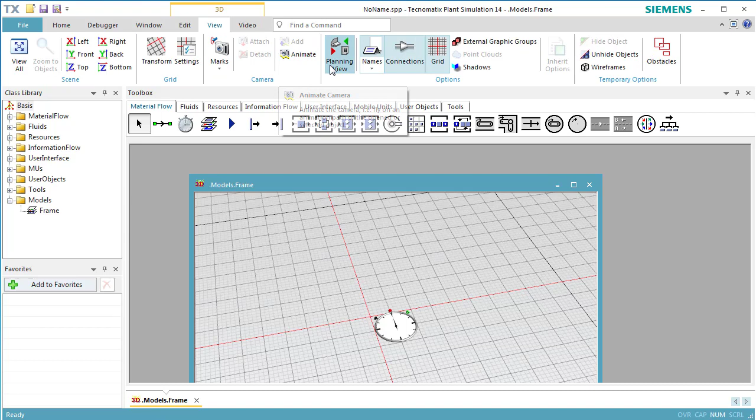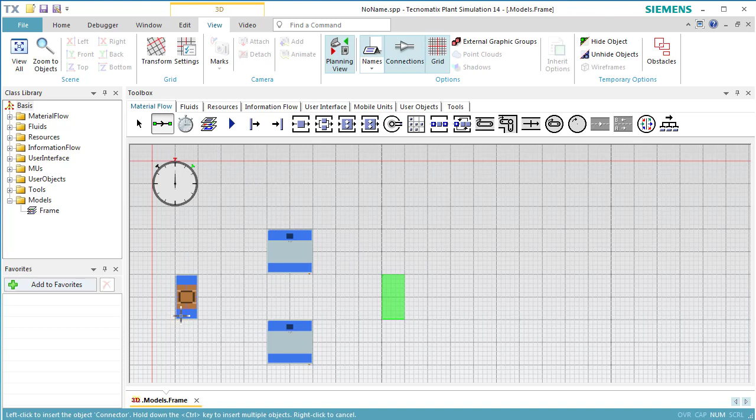To do so, we create a model with a source, two stations representing the main machine and the auxiliary machine, and a drain. The main machine should be the first successor of the source. First, we connect the source and the main machine, and then the source and the auxiliary machine. You can insert the two connections from the two machines to the drain in any order you like.

Then, we open the source to configure it. We want it to produce one part every minute. We click the tab Exit of the source and select the Exit strategy Start at Successor 1.

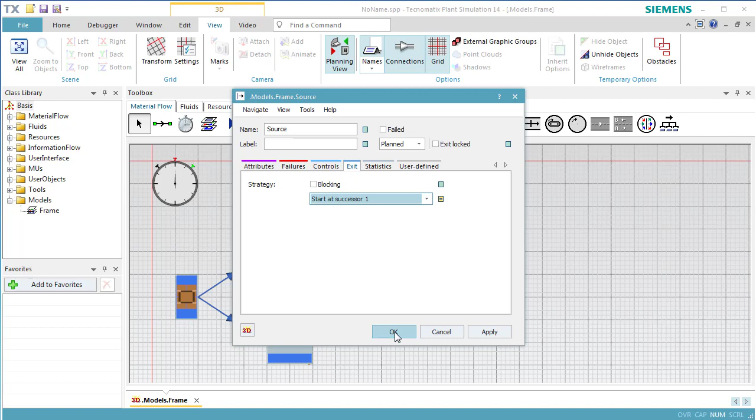We want to simulate interruptions of the main machine caused by failures. To do so, we add a new failure profile by clicking New on the tab Failures. We accept the default availability of 95% and the MTTR of 1 minute. MTTR stands for Mean Time to Repair.

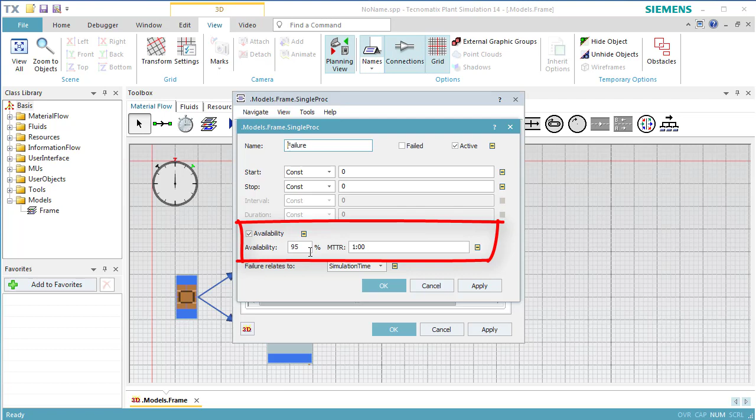As we want to run experiments with the Experiment Manager, we need the simulation to end after a certain time. To enter it, open the dialog of the event controller. Check the tab Settings and type a termination time of 1 hour, 1::, in the text box End of the event controller.

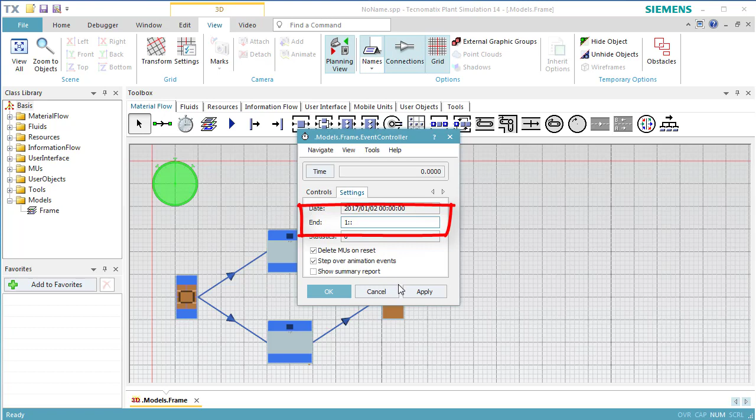Plant Simulation will automatically expand the time to 1 hour. Click OK to close the dialog. This model is suitable for the intended experiment study.

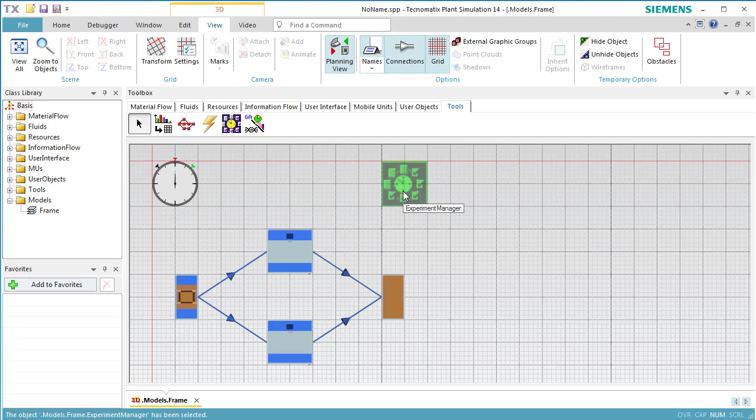Finally, we add the Experiment Manager to our simulation model. You will find the Experiment Manager on the tab Tools in the toolbox. Open it and configure the experiment. We first specify the output values as the target of the simulation study. To do so, we click Define Output Values on the tab Definition.

Drag the auxiliary machine to the first row of the table and drop it there. Then, we extend the name with the statistic value we are interested in, stat working portion, in our case. It's helpful to enter a description of the value, for instance, utilization of auxiliary machine.

We then click Apply to run a plausibility check. It tests whether the entered value exists and is suitable for a statistical evaluation. To enter a further output value, we click into the table Output and press Enter.

We click the main machine and drag it to the second row of the open table. We then place the cursor behind Main Machine, type in a period, and the name of the statistics value that interests us, stat fail portion in our case. It's helpful to enter a description of the value. We entered the description, portion of fail time of the main machine.

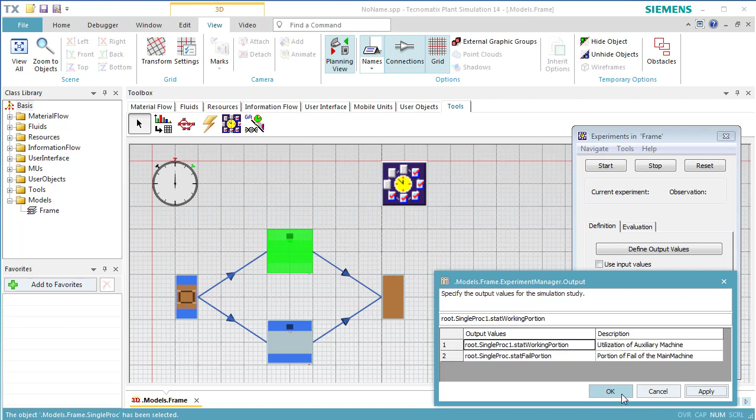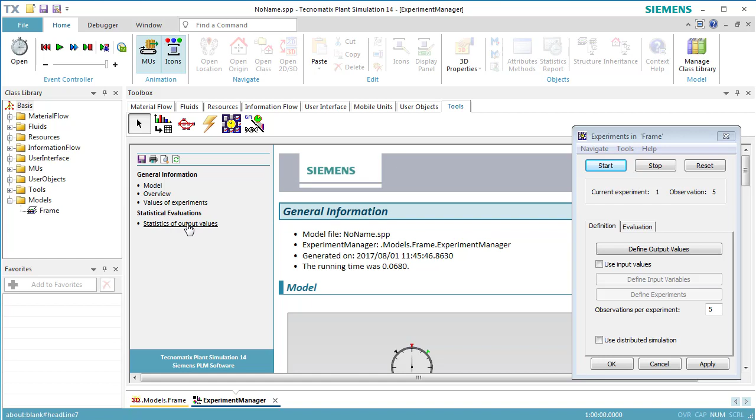We then click Apply to run a plausibility check and click OK to close the table. Next, we reset and start the experiment run. The Experiment Manager executes 5 simulation runs with different random behaviors caused by the failure we entered. After the experiments are finished, an HTML report will open.

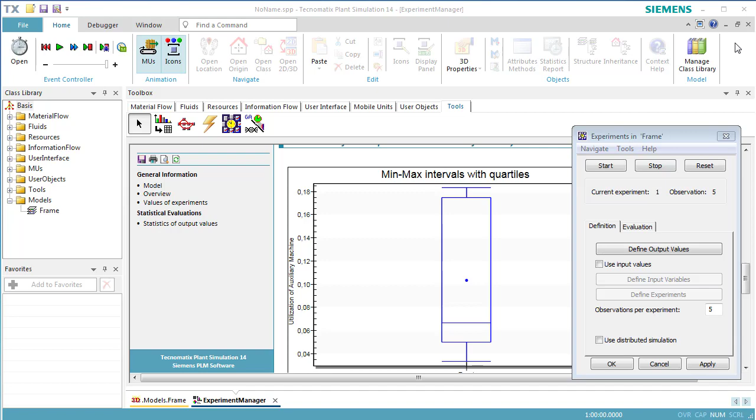A more detailed evaluation is available on the tab Evaluation of the Experiment Manager. Click the button Detailed Results to open a table of the numerical results. Typical statistic values of the observed output values, like the mean value and the standard deviation, are shown in numeric form.

The exactness of the mean value is described by the confidence interval. Be aware that one cannot draw conclusions with absolute safety. One can only make statements about a stochastic model with a given confidence level. The confidence level tells us with which probability the true mean value of a measure is located within the confidence interval. The default value of the confidence level of the ExperimentManager is 95%.

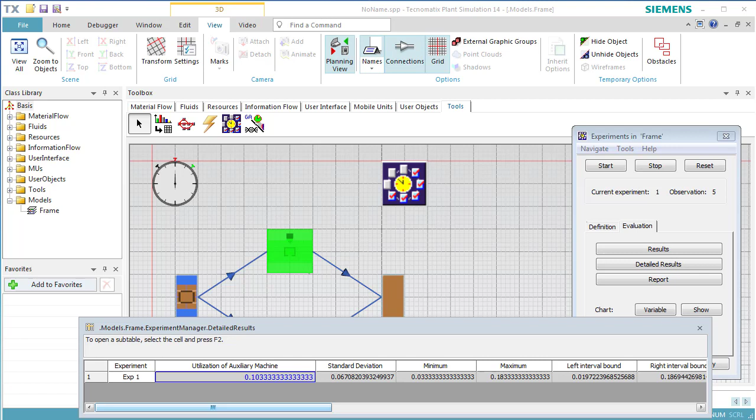After using the ExperimentManager for a statistical analysis, we want to check out how the availability of the machine influences the utilization of the auxiliary machine. We'll change the availability of the main machine. To do so, we define the input value. We select the checkbox Use Input Values and click

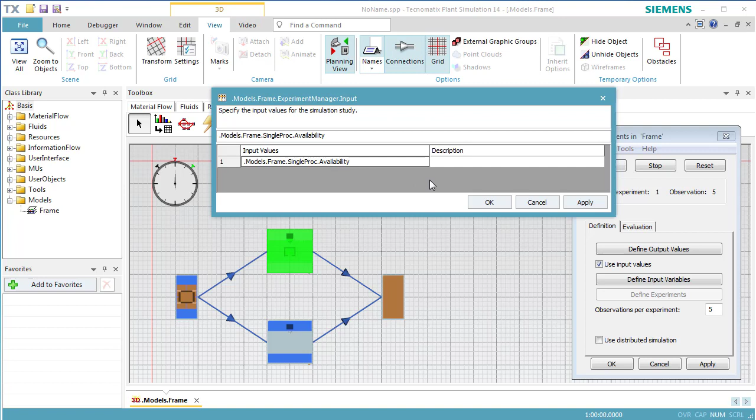Define Input Variables. To enter an input value, we drag the main machine to the first line of the table Input and enter a period, followed by Availability. This activates the button Define Experiments. We click the button Define Experiments.

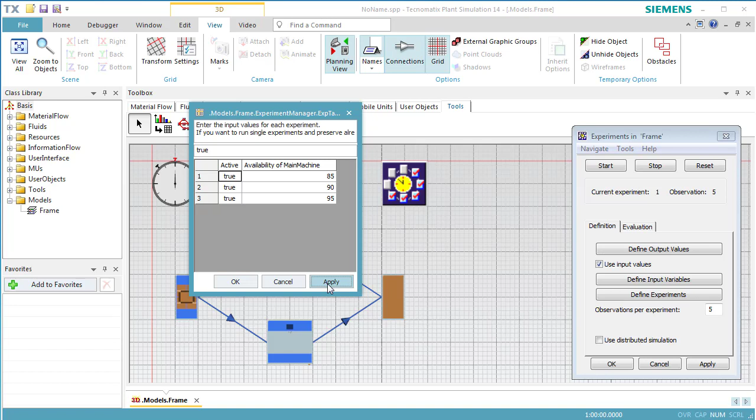In the table which opens, we enter the values 85, 90, and 95 for the percentages of the availability, each in a line of its own in the column. We then click Apply. The first column will be filled with value true, denoting that this parameter will be used for an experiment. Click OK.

This configures a new experiment study consisting of 3 experiments. Each experiment has 5 simulation runs, or observations. Now we're ready to execute our second experiment study to check out how the changed availability affects the results of the simulation study. Click the buttons Reset and Start.

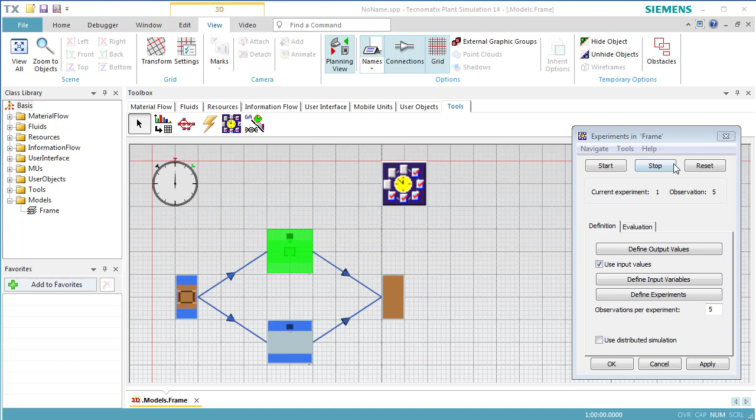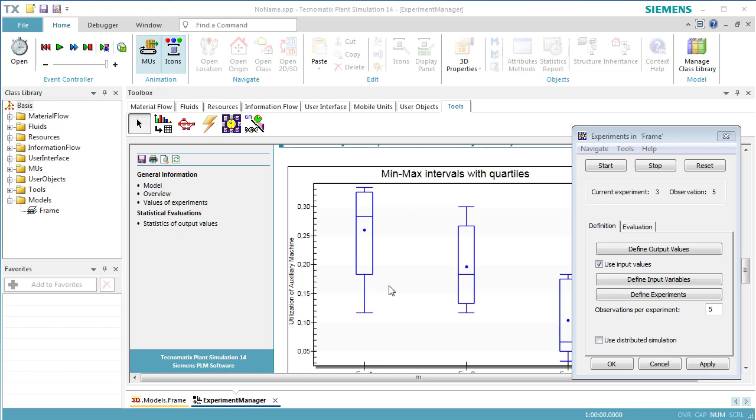The HTML report opens after the experiments are finished. Change to the page Statistics of Output Values. We can view the results of the 3 experiments in one chart on the tab Evaluation. On the tab Evaluation of the ExperimentManager, we can choose to show min-max intervals or confidence intervals.

The chart shows the number of the individual experiments on the x-axis and the observed values of the output values on the y-axis. It shows the expected relationship between the availability of the main machine and the working portion of the auxiliary machine. We see that increasing availability of the main machine results in a reduced working portion on the auxiliary machine.

Click the tab Evaluation of the ExperimentManager. Select Confidence. Comparing the confidence intervals shows that this effect is not statistically significant. In other words, the observed differences can be a result of the random behavior of the model. Further studies are needed. You can close the chart.

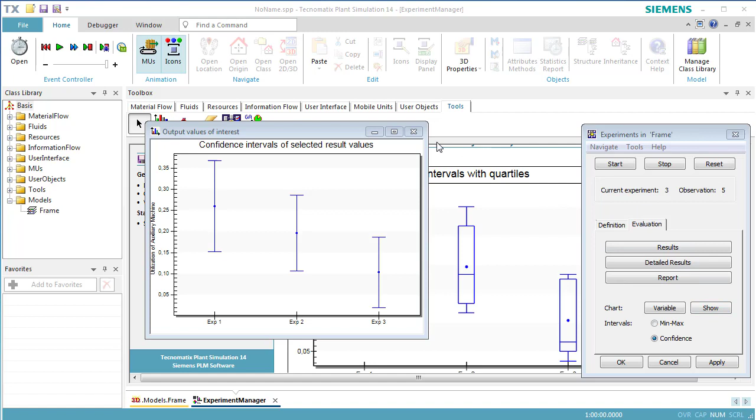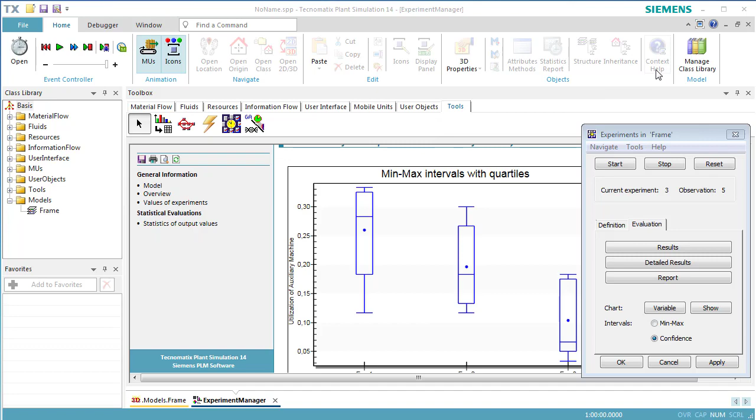To get results with a greater reliability, we must perform more observations per experiment. We change to the tab Definition and type in 50 observations per experiment. After the study, we check the width of the confidence intervals. Click Reset and Start to run the experiments. After the experiment run is finished, we select the tab Evaluation.

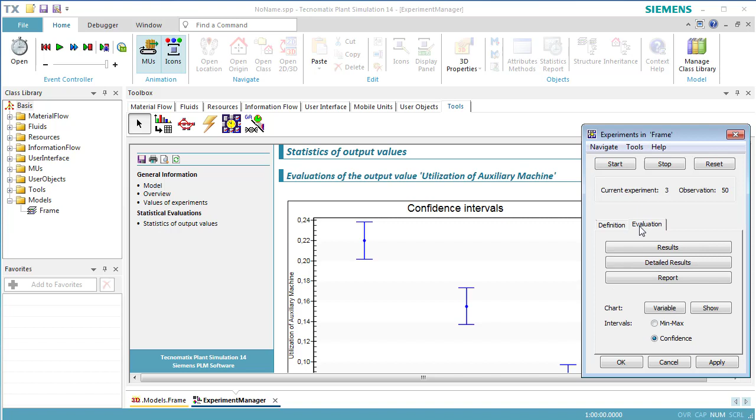Select Min, Max and click Show to open the chart. More observations obviously led to greater min-max intervals. We select Confidence and open the chart again. As is well known, more observations led to a reduction of the width of the confidence intervals.

We compare the confidence intervals and recognize a significant difference. In our study, these observed differences cannot be a result of the random behavior of the main machine. The differences are significant and based on characteristic properties of the model. If you have doubts, repeat the study with 500 observations. This concludes the video using the ExperimentManager.